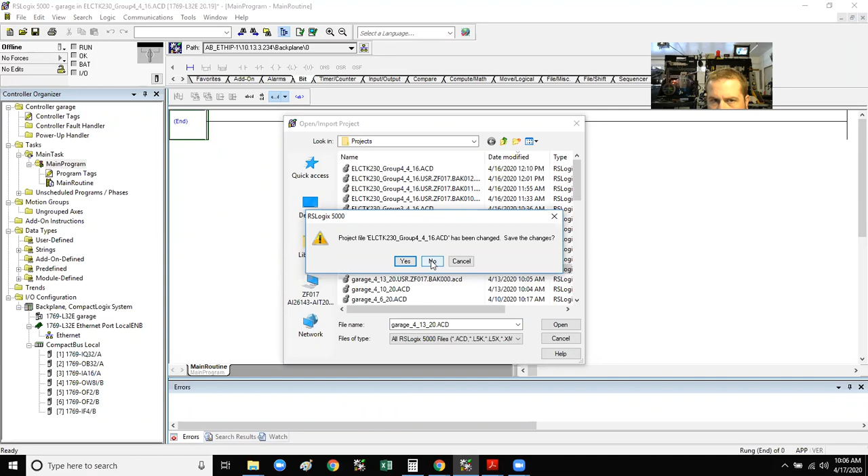Hi Nate, you didn't say hi to me. Okay, this is what we got so far. Hi, hi. You're right, we've got everything except for, let's look, you need like another red strobe light or something, right?

Well, we got the strobe. Wow. Really? What? We've got the strobe while. I don't know, let's look. Where is that assignment? Oh, it's on Blackboard, isn't it? Temp sensor.

Two. 32. There it is.

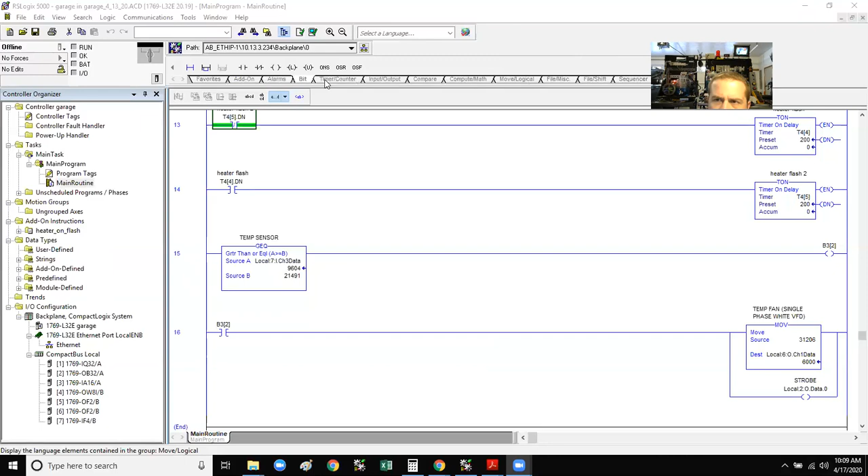Okay, you got it. All right, I think I told group 3 or 4 this yesterday, but I ran out of 3-amp fuses, I gotta write that down. So I put a 15-amp fuse in there. There's actually a book named that. You want me to send you some, Zach? Sure, I need... but I need you guys to let me know when we're running stuff. If that trainer behind me starts smoking, please say something, okay?

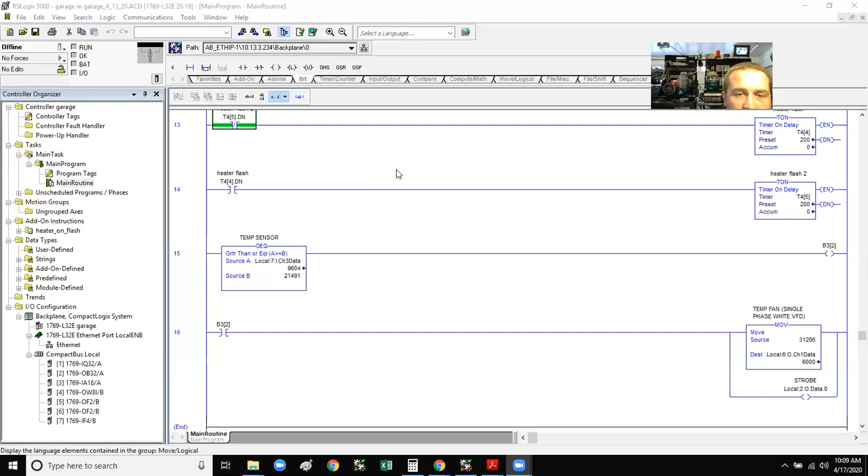You don't need to. What size did you put in it? 15. 15? Oh, I had. Did you check the amp draw on that sucker? You got an amp clamp down there? It doesn't matter, I don't have a choice, I don't have any other size fuses, John. Well, lead wire, understand, the lead wire is only good for 3 amps. It's 22. That's why I'm asking if you've got an amp clamp on there to see what. Nope, sure don't, I'm just taking a risk.

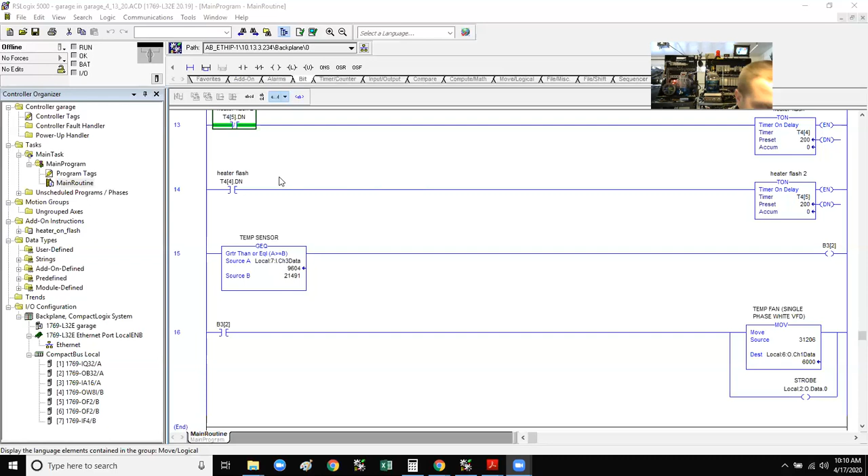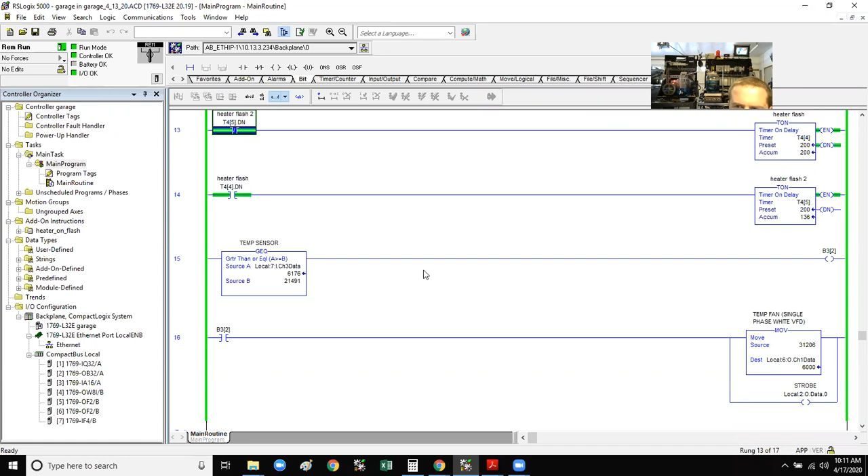All right, sure. Why is it reading at 2 degrees Celsius? Can you go back up to the rungs that show temperature?

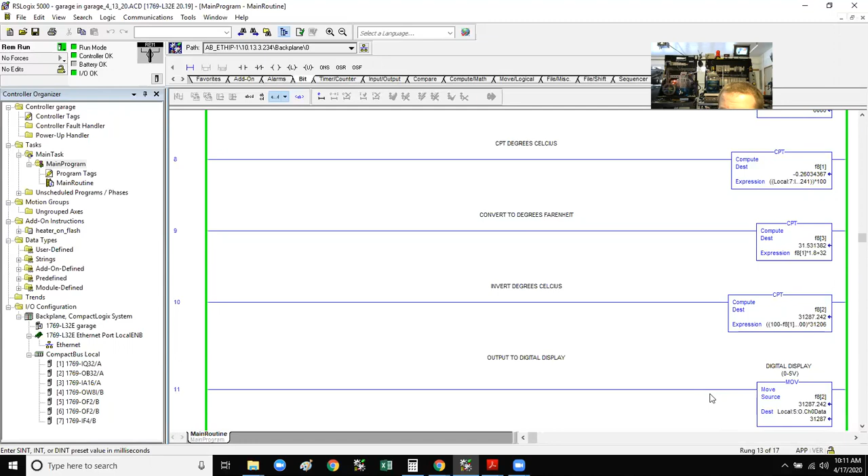Stop. Rung 11, why are we showing F8[2] as 31,287? Degrees Celsius. Yeah, we had to do Celsius, and then convert it to Fahrenheit. Right, but rung 8 should be showing the temperature in the garage right now, and it's reading negative 0.26.

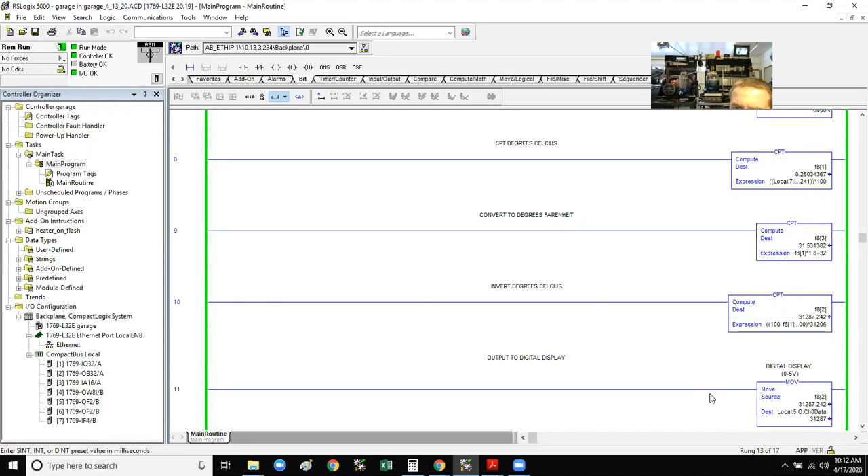Well, in Fahrenheit that's 31 degrees. That's in Celsius. Yeah, I'm not that cold, you know what I'm saying? I can tell you what the temperature is in here.

64. Oh well, I don't know that. Yeah, that's odd. You might have to do some troubleshooting. How should we do that?

Come on, class. What is it displaying, 2 degrees Celsius? I can't see... well, yeah, now I can. It's negative 0.26 Celsius, and he said it's

62 degrees in your garage? 62 degrees Fahrenheit. So that puck the thermocouple is connected to should be outputting a certain amount of milliamps, right? Yeah.

So check on, will we click on rung 8 on the compute function? What should I do? No, I'm saying we actually need to get our meter out and check what's going on behind me. Oh, see how many amps it's putting out. Yeah, so right now it's probably less than 4.

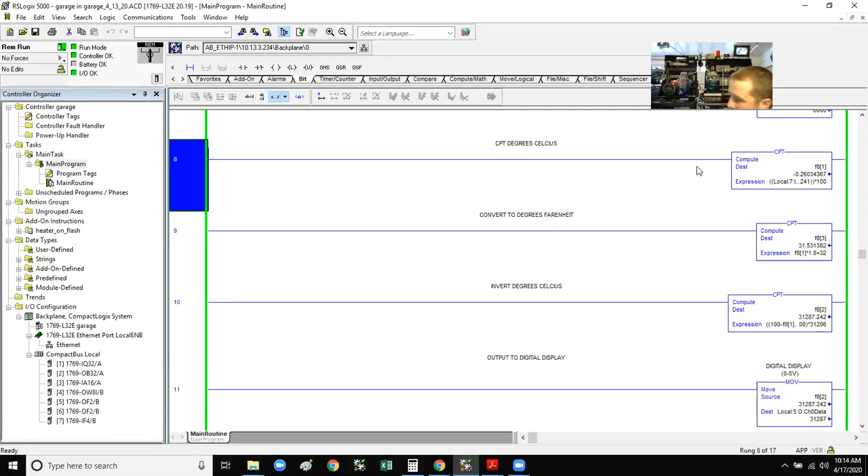Yeah, it's showing negative, yeah. So somebody tell me which input that is for the air temperature, and I will get out a meter and read it. Hold on, I got it. We will do some troubleshooting together as a class, as a family. I prefer to troubleshoot alone.

All right, which input are we looking for again? Sorry, the temp in, right? Air temperature, yeah. All right, temperature sensor is on 7-1, slot 7, input 1. If I put this here, you guys read that.

You already broke the circuit? No, I'm going to check voltage on the puck, see if we got 24 volts. Oh okay. And then I will break the circuit and check current.

Can you guys read my meter, or do I need to be closer? I cannot, I don't know about everybody else, but I can't because it's on a small screen on my computer because of the shared screen.

Can you pin the video? Oh, you can swap them, there's a thing in the corner, swap shared screen with video. If I set it there with your video pinned, can you see it? Yeah, we can, you can see it if you're in full screen. Tilt it forward a little bit more if you can.

Is... yeah, besides John paying attention? Yeah, that's good. Anybody? 'Cause I'm sure right now you're all pulling up the specs. I could definitely see it. I can see it, I was switching over to my laptop from my phone. Your laptop? Yeah, laptop.

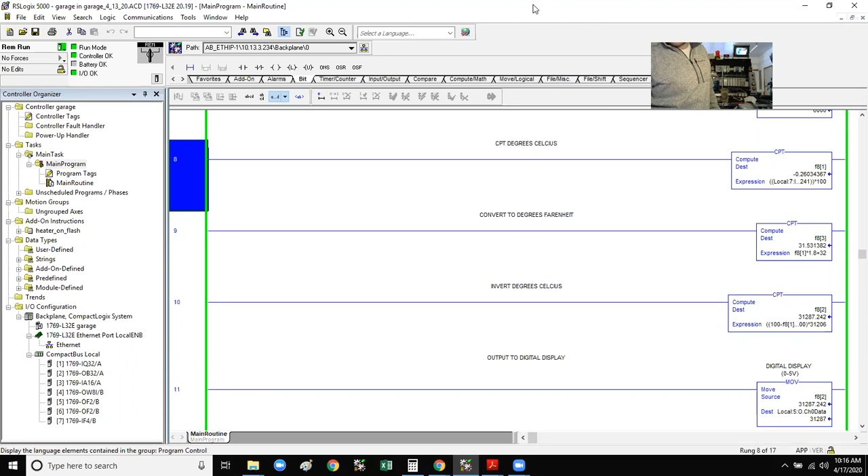I don't have the puck pulled up. Is it in there? Do we need the puck pulled up? Can't see the puck, do this. No, the data sheet's in there. I think you meant the data sheet for the puck. That's impressive, Zach. Zach. What? The table.

Bless you, what's yours? Bless you. Nice shoes, Rona. Coronavirus. Yeah, sorry, it's not the Corona. She said thank you. Bud Light, what are you doing? The Bud Light? Yeah, it's the Bud Light. This guy right here, yeah, we have Bud Light Lime in the fridge. This is that you were drinking the other day. Drinking right now, Jesus.

So you got your voltmeter on it, put your black lead on, I'm assuming, the white wire, and then your red lead on the red wire. I don't have the data sheet, I'm just looking at a picture of it. I think that's... I'm assuming I got a good 24 volts in because I don't know if you can see it, but there's a green LED indicator light.

Nah, I can't see it. You can't trust those either, Zach, those only take like 2 volts to light up. You see my meter? Yeah. It's not reading anything, 0.0.

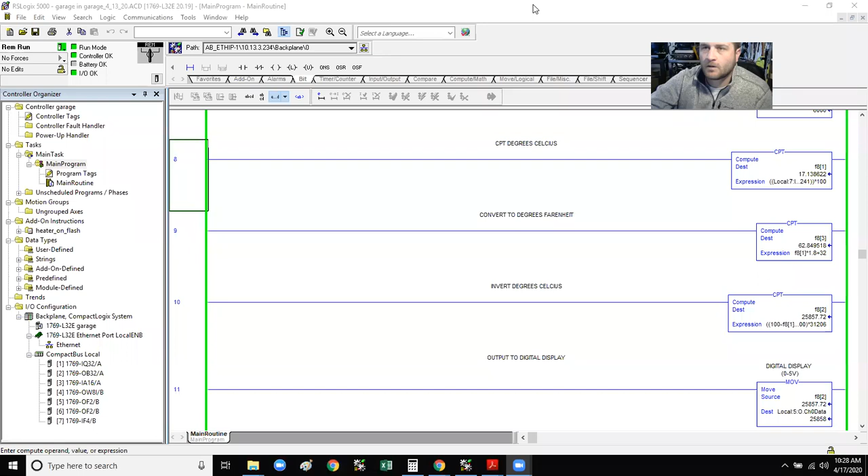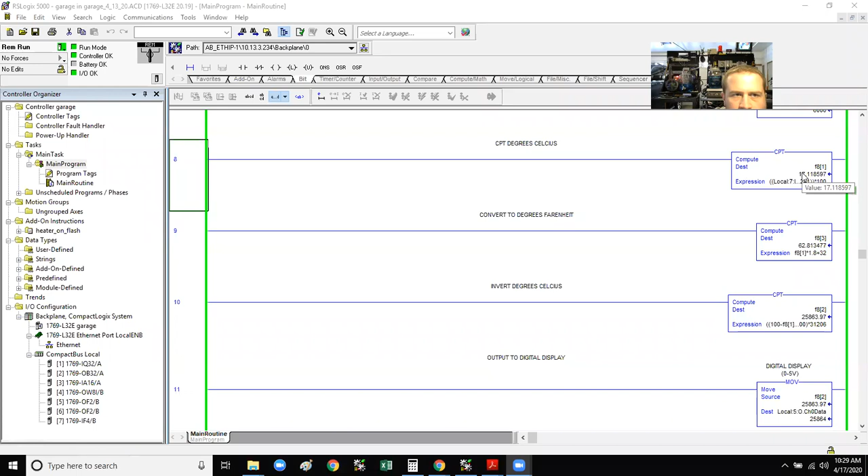Okay. We're reading at 20 degrees Celsius and it says showing 17... 63 degrees Fahrenheit. Okay, so where were we?

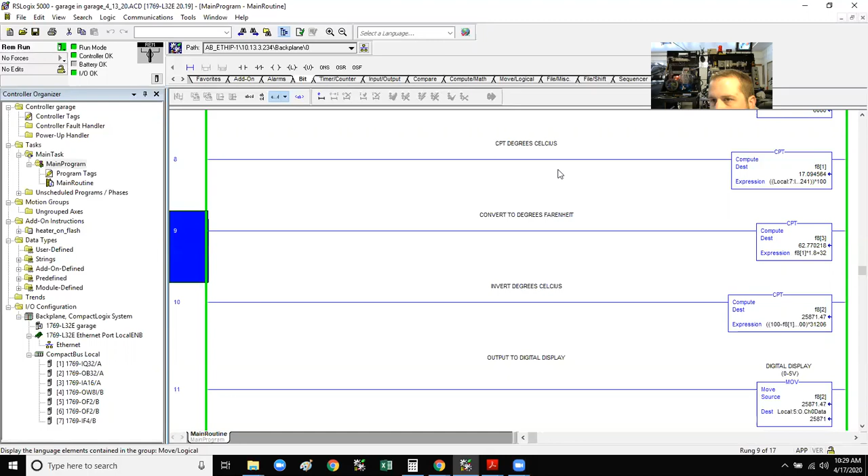We need to run the process now. Yeah. All right, Zach. Oh, we're already running. Okay, what do I need to do? How do we run the process? Somebody who has the process pulled up, tell me. I'm looking for it, I don't have it pulled up right now. I don't have that one pulled up. I got all the other stuff pulled up. Let me do...

Yes. I'm seeing the reading through degrees, it... Fahrenheit, start to rise. And then when we get to 80, then the soldering iron should turn off, right? Yes. Well, we're at 80. Oh, no. Oh, 80.

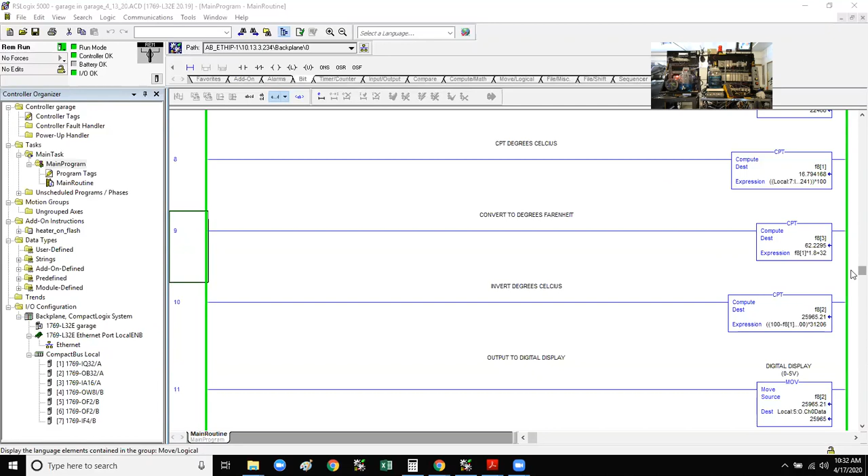That's fine. We need to adjust the numbers because of that lag that's going to be in there. So add a timer maybe. No, I think we go down to the rungs. Do we have the numbers turning on the soldering iron?

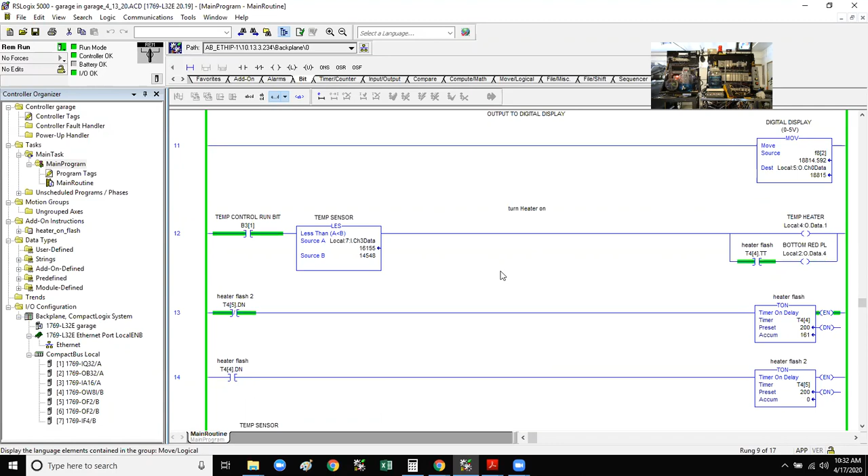Temp heater, so rung 12. Right now we're telling it when the temperature gets up to 14548, turn the temperature heater on, or below 14548. See that? But right now it's off, but you'll see the temperature start to fall. When it gets below that number, it will kick on.

Wait for it. Now it's on.

So what did we talk about doing last time? Maybe you said timer, Brady? I suggested that. Last time, I don't know. But I meant today.

I thought Jake had talked about how you don't turn it off until it hits that high temperature, and then you turn the fan on until it gets to the lower temperature. So instead of having it at 80, put it at 120. Then at the same time have the fan do that, and the fan turns off at 80, so it just stays in between those two ranges.

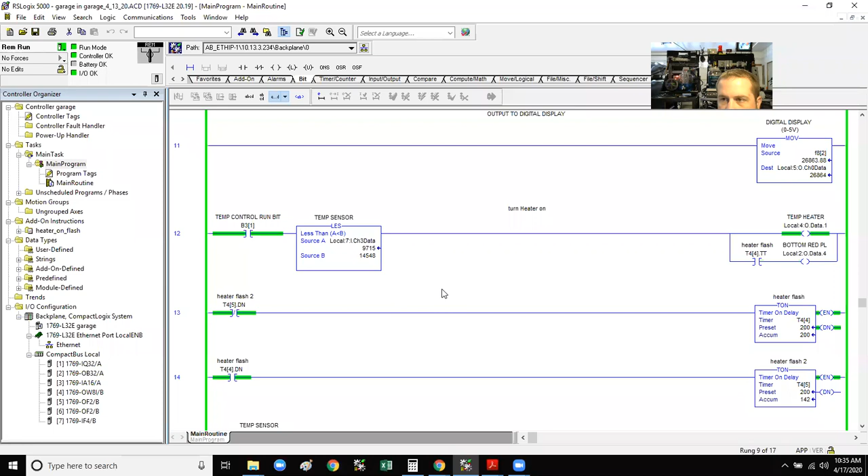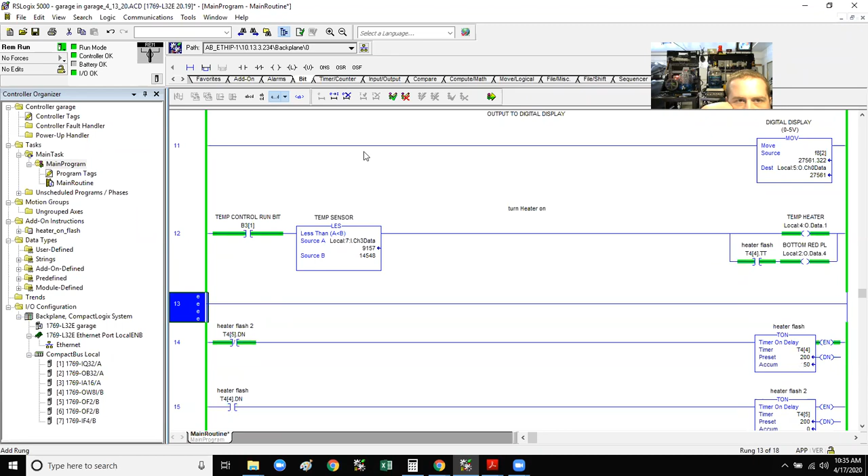So let's create a timer. Let's add a rung there, Zach, somewhere. Okay. Let's go offline while we do this. All right. You got to click on the rung. There you go.

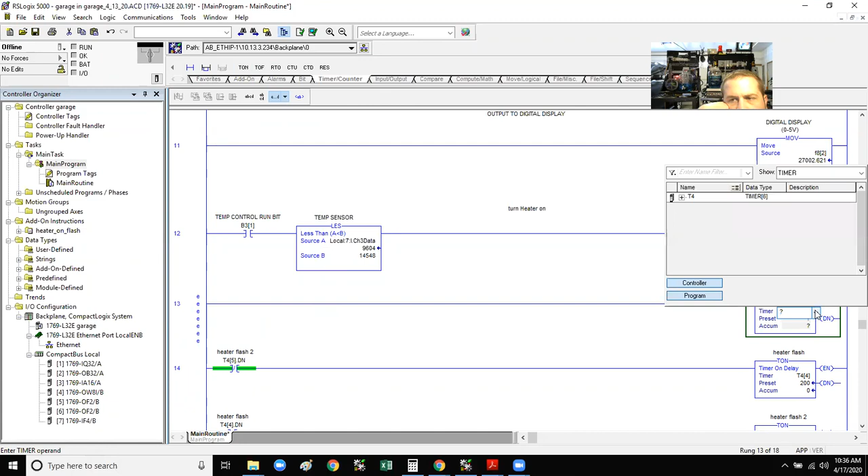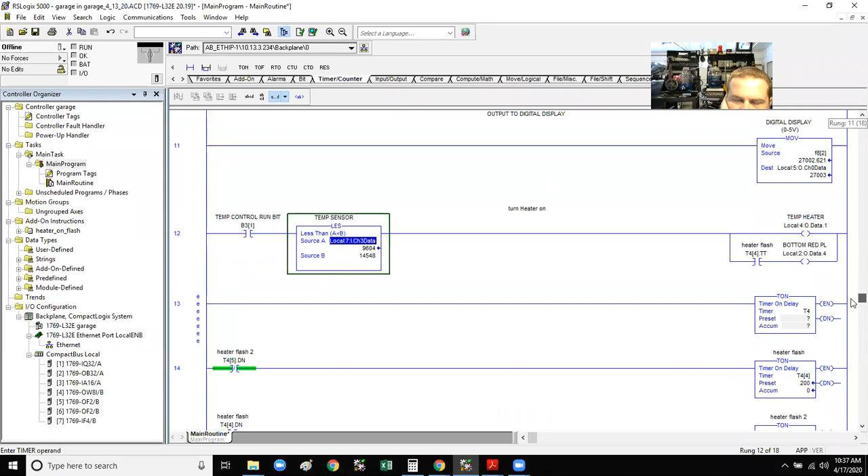Does it matter which one I do? Well, we need to just grab one that we're not using yet. So we've labeled 4 and 5, but I don't know if we've used 1, 2, or 3 yet. I'm thinking we've used 0 and 1 of them because we have a half-second timer and a 0.2-second timer. So let's go look and see what our T4[0], T4[1] are, and then find the other timers - T4[4] and T4[5]. So let's go into controller tags on the left.

Controller tags, and let's put a description into T4[0] and T4[1]. Yeah, and just call it - what is that? Process on, is that what it is? Control on flash. Okay. And then the next one would be control on flash 2.

Now we can pick either T4[2] or T4[3] and label that just 'sensor read timer.' We're going to start with 10 seconds, but we might adjust it. Cool, so then we're going to use T4[2] for the timer that we're using. Okay.

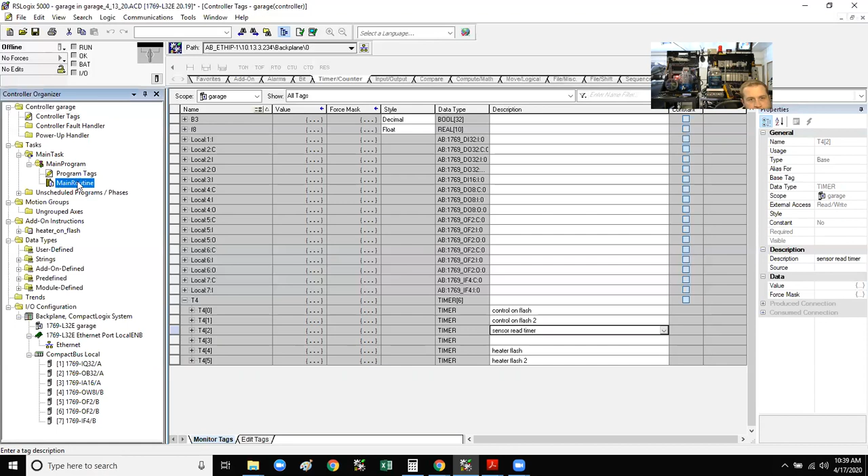Zach, is this why we label things while we go? I think so. Okay, I was just checking.

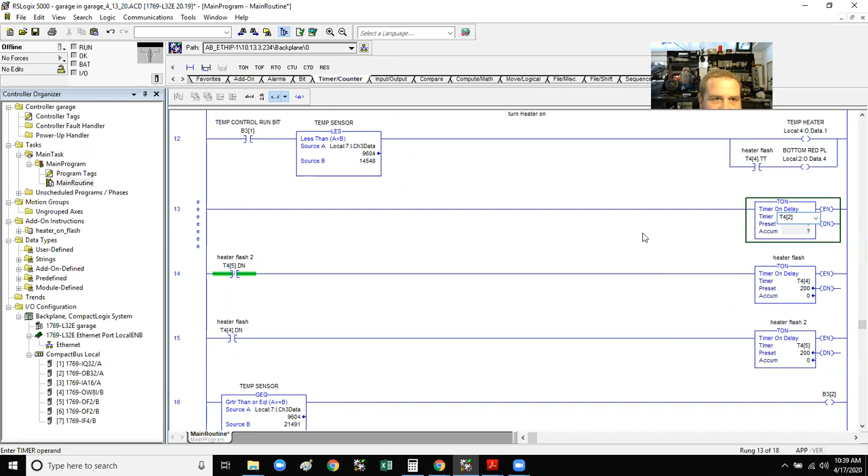He's got jokes. Well, was John the one we're voting to kick in the chat today? Hey, no, that was a serious question. Don't kick me. I think Don gets to decide since he got voted out yesterday. I think we should vote Don out again today. Yeah, I passed go, I collected my $200. I'm good. Hey man, no - if your kid starts hollering and screaming again though, you're gone. You're done. Oh well, let me go get him on the mics then. Don't sound too eager. Oh my goodness.

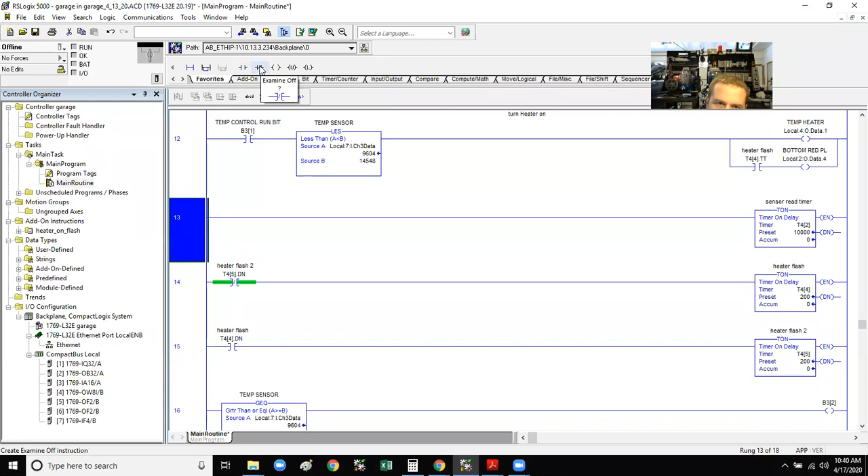Okay, so we got a 10-second timer on it. And then what's going to make that thing reset? Can't we do a reset rung where when it reaches its preset, it will just reset itself? Timer timing. You could put a T4[2] done instruction in front of it. I didn't even think about that. But would that reset it though? Wouldn't it just stay at the same accumulated number? If you use that one, if it's examine if open. Yep.

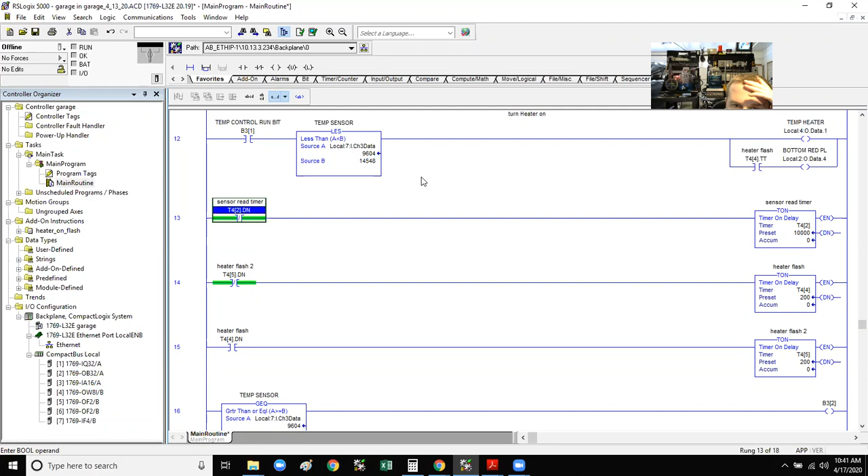Okay. What do we want to happen every 10 seconds? We want to read temperature. Yeah. So then we need to find the temperature sensor, right? Mhm, and then use that timer timing bit.

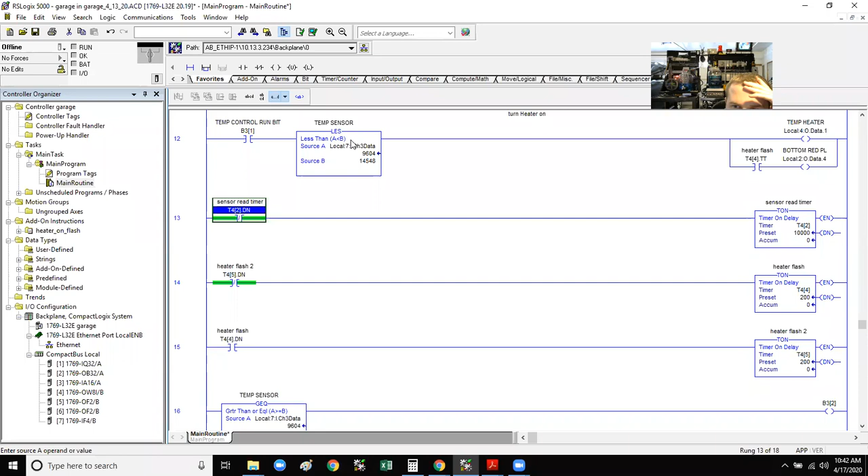So put the timer timing bit before this. No, because that rung is to turn the heater on. Probably rung 16 - we want to either control when the temperature sensor... that's red, B32. So it'd be before this one. What are we using B32 for? Maybe just to turn the temperature fan on?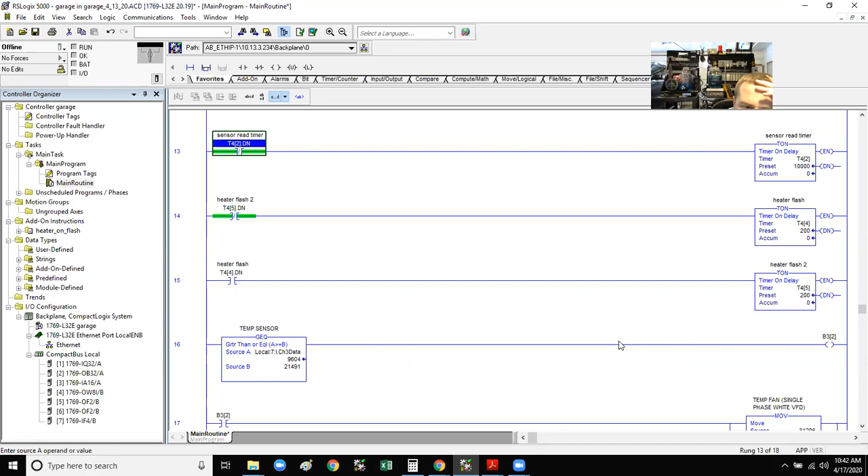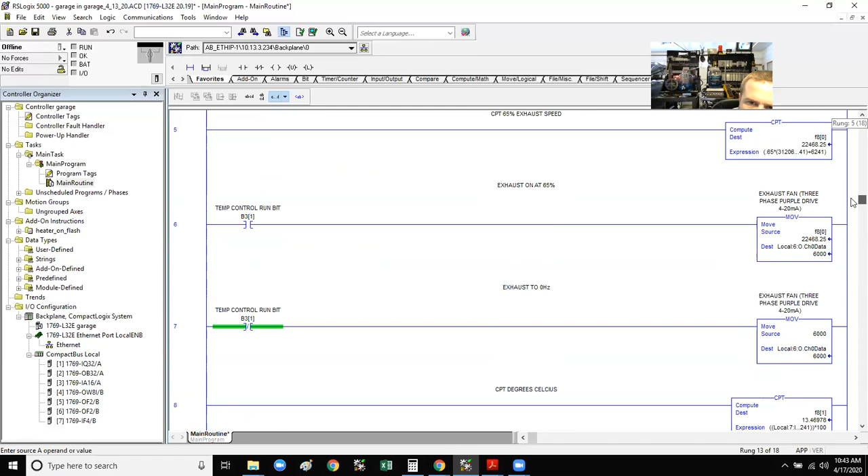Which rung are we... which rung can we put this in? Scroll down a little bit. Nope, can't put it down there. Yeah, just scroll up, it's at the top. Nothing in there, go back down. Stop, go back up a little bit. Stop. Can we put something in any of these rungs? 8, 9, 10. I mean, we could.

Because that's our temperature, right? Yeah. What are we doing in rung 8? Reading, computing Celsius - yeah, computing from the temp sensor, T2.

But what if we told it, okay, only do that calculation every 10 seconds? So then put that timer timing bit before that compute function. Yeah, or done bit. Yeah, done bit. Yep.

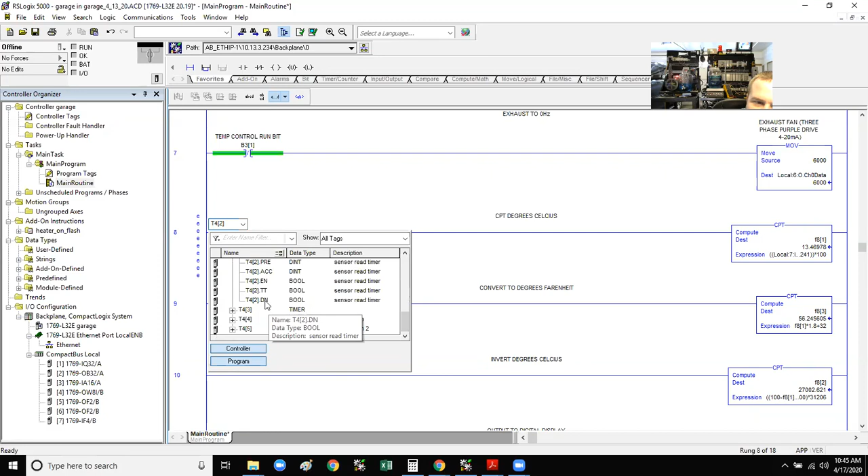Zach, if it was me, I would probably put that done bit on line 8 for the compute Celsius. That's a good idea, John - I don't think any of us would have thought of that. Thank you. Oh, you're welcome, Brady. That's why I put my 2 cents in, brother. Still get $1 back. I think we might have problems with it, but we can run and see what happens. That would be all right. So let's go ahead and run that and see what happens - see if it reads the temperature every 10 seconds.

Think on the next one we'll get the temperature to turn off. Yes. How come it never turned off? Did it? No, never did.

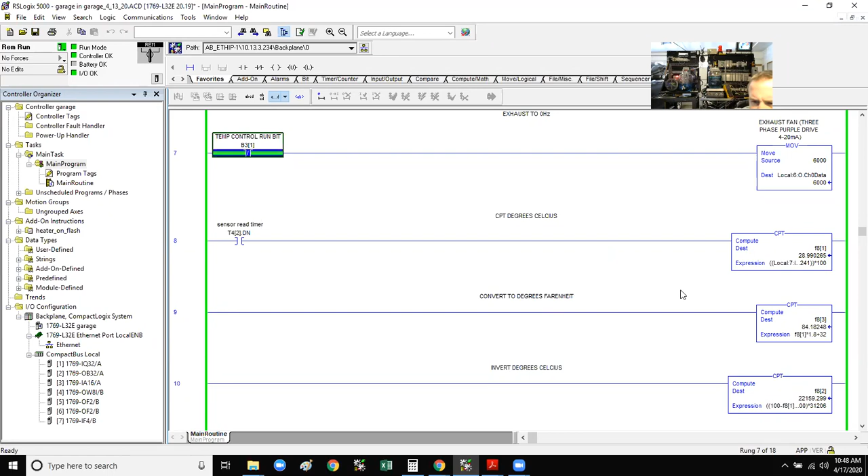Feel like we're going to be waiting forever. Oh boy. It's just sitting at.

Okay, we're below 80. Why is it not kicking on? Are we using it being the measured value as something causing something to work later on? Like, are we using the temp sensor data? Yeah, okay, so here's turn the heater on. We're below this number. Why is temp control run bit B31 not energized? The bottom red pilot light isn't either.

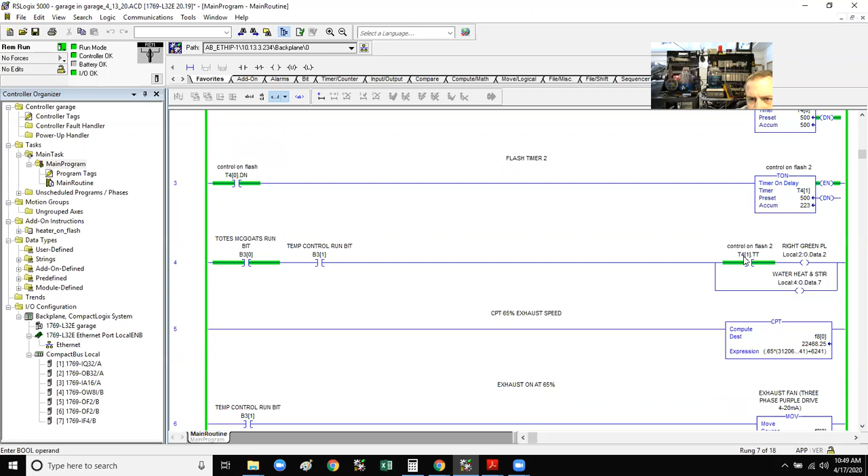Oh, because I didn't push the push button. Process control is not on. Come on, Zach. Now we're running. Yeah, Zach, I was looking. You didn't turn on process control. Thanks, John.

Why is it still clicking on and off? Maybe because of rung 3. That's why.

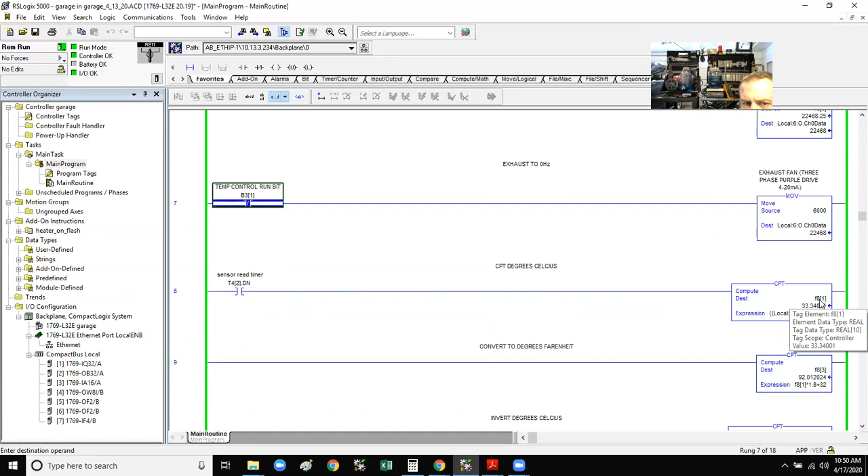We're using the temp sensor instead of this. So we need sensor read timer T42 done on that same rung, right? Hey? Right. Mm-hmm.

Isn't that gonna throw off your heater though? Because it's only turning on when that sensor reads, or the timer is done. Yeah, but that's what we want, right? We only want it to turn on every 10 seconds.

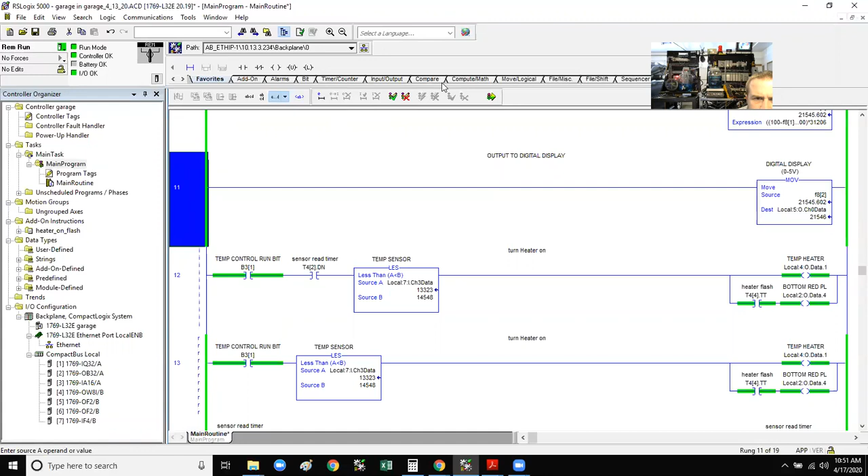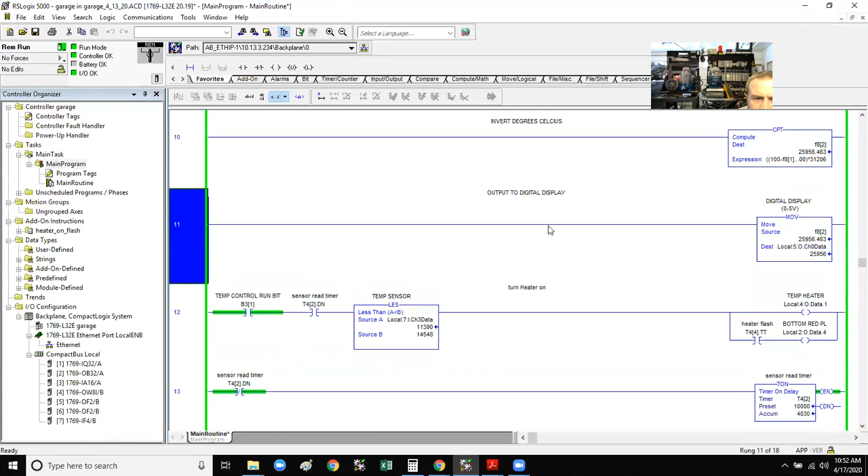Wait a minute. Yeah. Right? I guess my serious question is, again, hey guys, quiet down so I can talk. If we're trying to keep it between that window, why don't we just have it turning on and staying on until it's close to the end of that window? I said, how come we don't have it just turning on and staying on until we get to a desired temperature or temperature range?

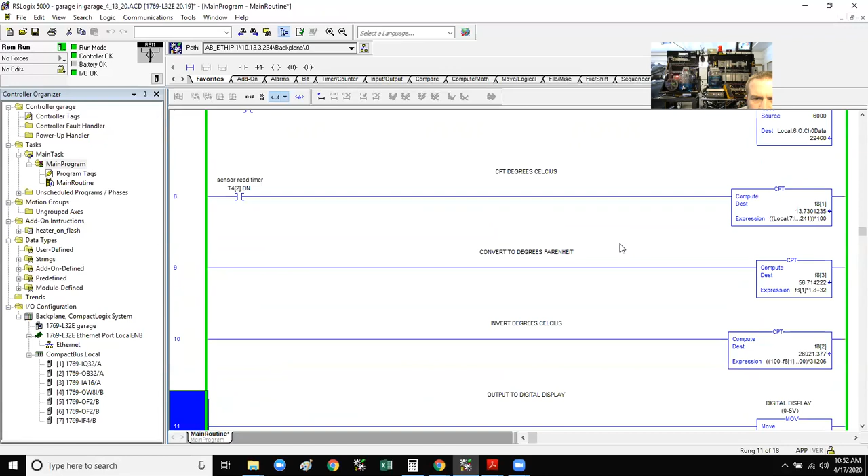So like stay on till 100 degrees for both of them. You mean having a target temperature in the middle of the range instead of... Yeah, or something to that. Yeah, let's do it. Degree. I mean, I don't know.

Let me show you guys how to use Excel for handy interpolation. What are our numbers for the temperature sensor input? 4 to 20 milliamps. Hold on, I gotta pull them up. 6241 and 31208. And if this is 0, yeah, this is 100.

If we have input and we have a temperature, so what would our formula be for this? If we said that this, that would be our max, so that'd be 100.

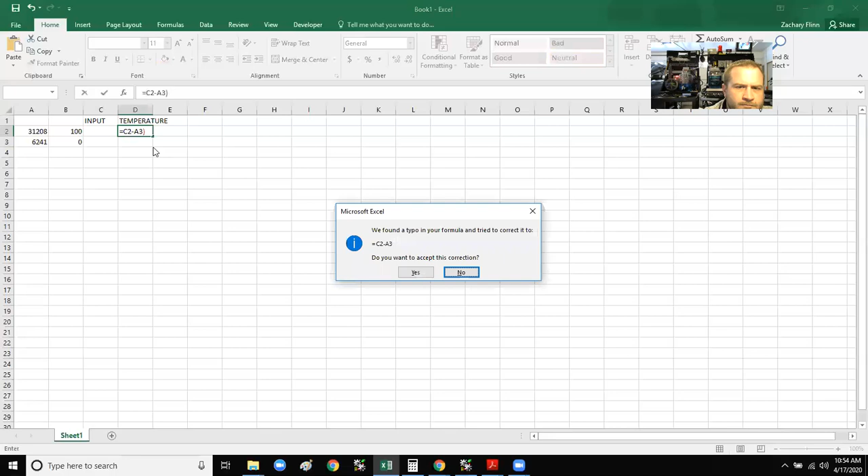Equals this minus this, divided by this minus this.

That would give us a percentage, which would also give us degrees Celsius, right? Yes.

So if we had an input of 6,000, or 10,000, it'd be 15 degrees Celsius. So I guess we'd have to take this whole thing times 100. See what I'm doing? Instead of having to do the math every time. Yeah. You lost me at 100 though.

Why are we? Oh, because instead of outputting a percentage, we want a temperature. Yeah. Input 1,000, we get an output of

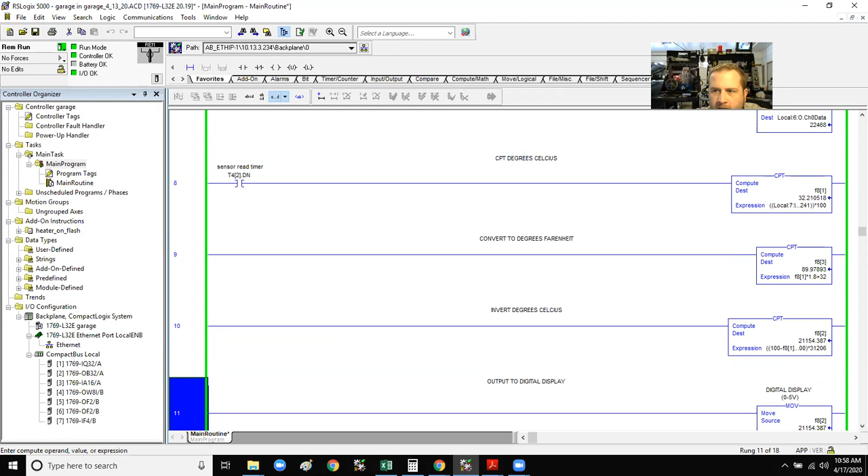So what's 100 degrees Celsius? No, we want 100 degrees Fahrenheit.

What's the formula for Celsius to Fahrenheit? Subtract 32, times, multiply, 5 divided by 9. Yeah, 5/9.

What is it? Subtract 32 and then multiply times 9/5, by 5/9, times 5/9. Yeah. Celsius to Fahrenheit is Celsius times 1.8 plus 32. Wow, you're smart. Oh, were we going from Fahrenheit to Celsius then? We're going from Celsius to Fahrenheit, right? Yeah, yeah, 1.8, so we plus said 32.

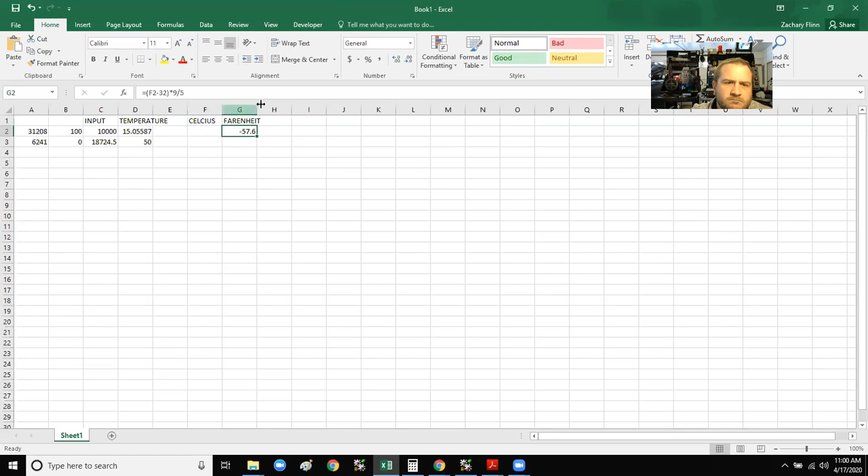Yeah, we went the wrong way. That's what I was saying. I thought you said Fahrenheit to Celsius. My bad, yeah, it's all what is it? It's plus 32, times 1.8. Wait, that's 9/5. Yeah, that's the same either way. Yeah, so that's the right one. No, because 0 degrees Celsius is not minus 57.6 degrees Fahrenheit. I think it's times 5/9.

Oh, it's 5/9 degrees Fahrenheit. Wait a minute, you don't even have a number in for Celsius. I know, but it's 0. Is it going to assume 0? No, it does not. Does it? Yeah, it assumes 0. It should be 9/5 times F2 plus 32. Oh, okay, so 9/5 is 1.8, times this.

So we had the order of operations wrong. If I put in 100 here, it should be 212 Fahrenheit. Right, okay, good. So then what's the opposite? We wanted to take Fahrenheit and convert it to Celsius. So that's whenever you do the Fahrenheit number minus 32 divided by 9/5.

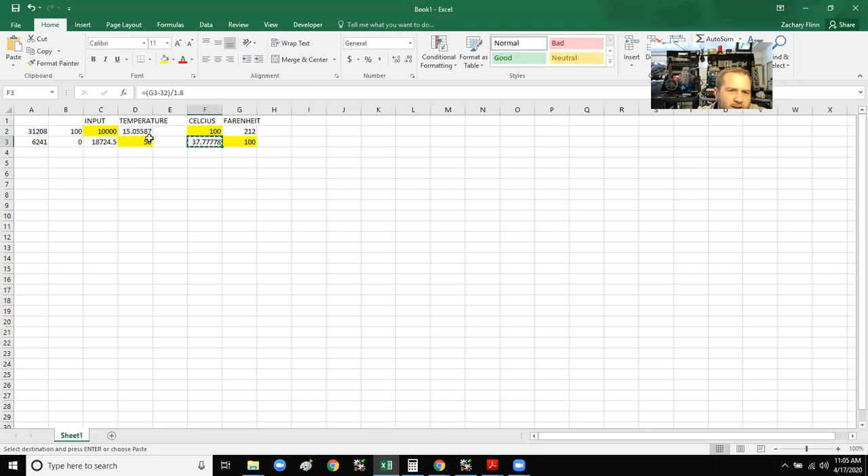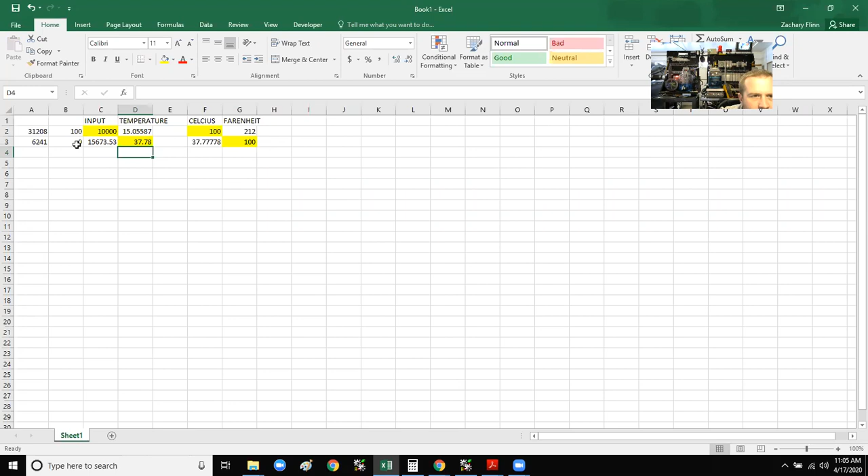If we had a temperature of this, 37.78, our number needs to be 15,673. Got it? Got it. Got it.

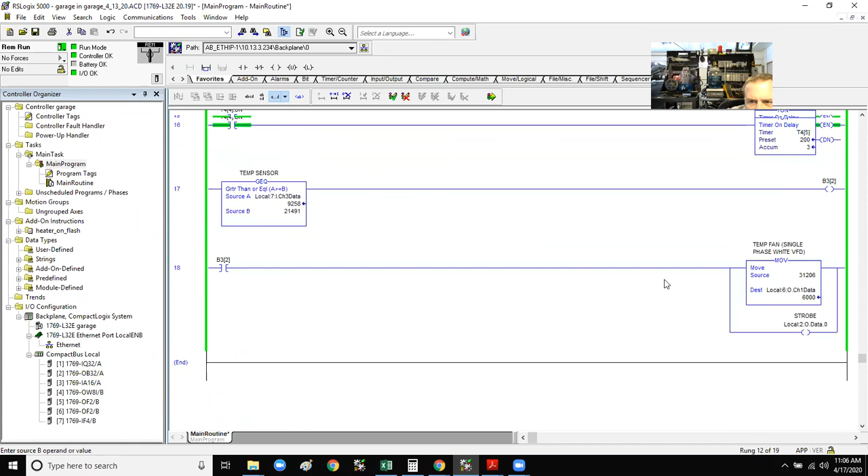Turn heater on. If this is less than 15,673, turn that on. And where's the turn the fan on? This is greater than 15,673.

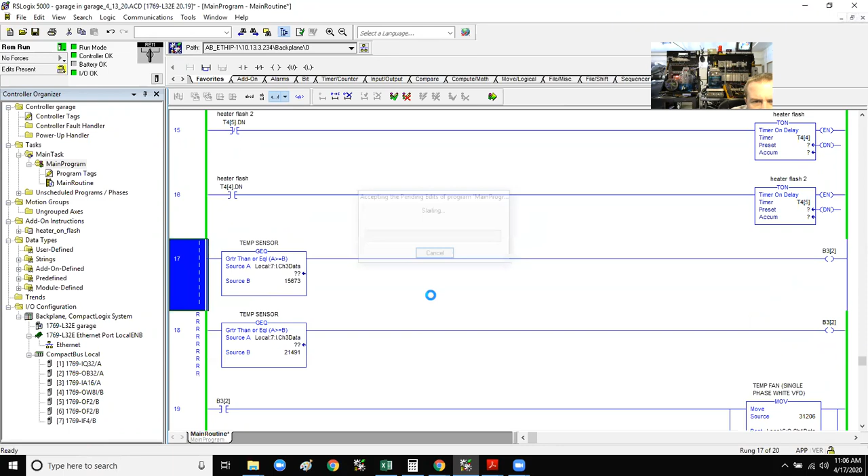Or do you want some overlap so we can see if we can draw as much current as possible and burn that sucker down? Yeah, we should do that. Yeah, let's do that.

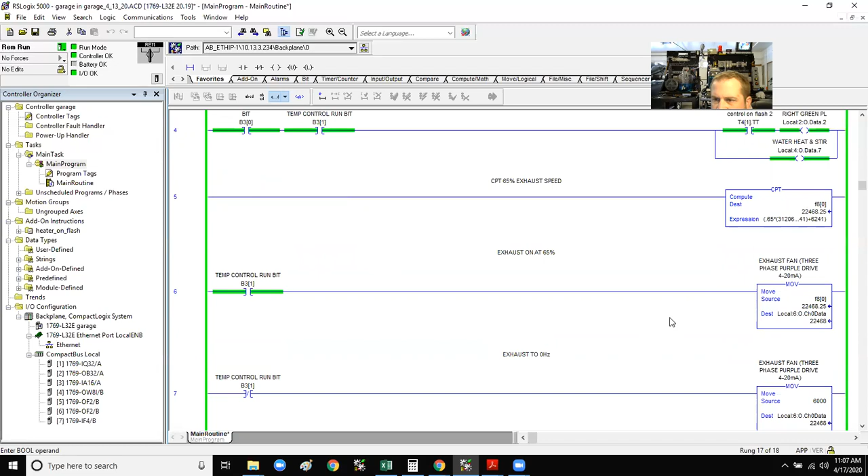Why isn't our temperature heater turning on? Did you hit auto start this time? Yep. Did you hit the green button? Yeah, okay.

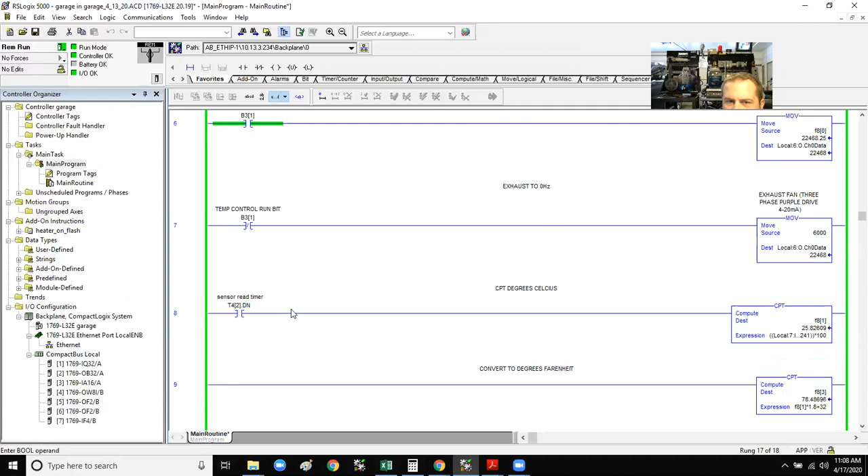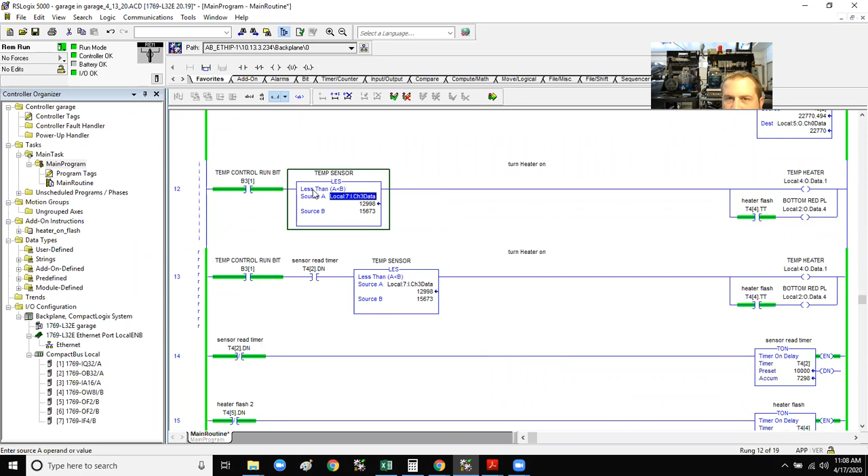I gotta head out because I gotta get back to work. Bye, Kenzie. Is there gonna be much after this? No, because it's 11:10. Yeah, I know it's 11:10. That's why I'm going back to work, Nate. Stop yelling at me. You can get me first. I don't like when mom and dad fight. We're not fighting, Luke, we're just having a discussion. We're just mad, but I gotta get going. So if class is over, I gotta go. And if class is over, then I'll just finish it on the YouTube video. Okay, bye. Bye. It's all your fault, Nate.

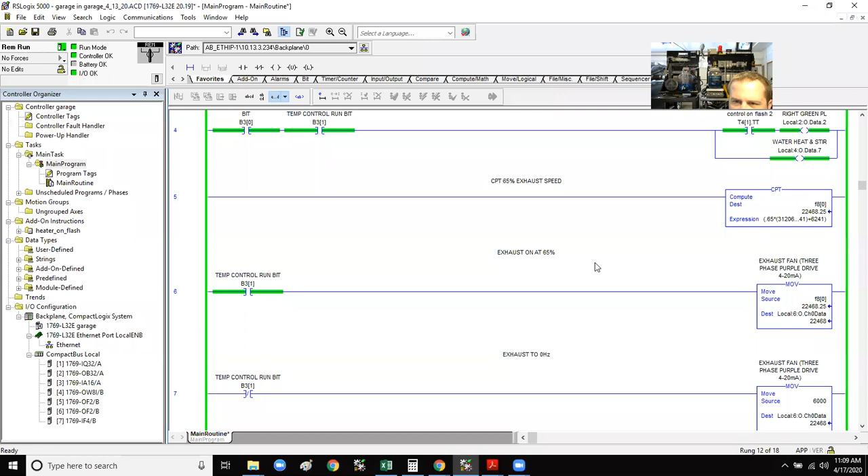Okay, so when we get to 100 degrees Fahrenheit, the soldering iron should turn off and the exhaust fan should turn on. Where's our temperature in Fahrenheit? Right there, 72.

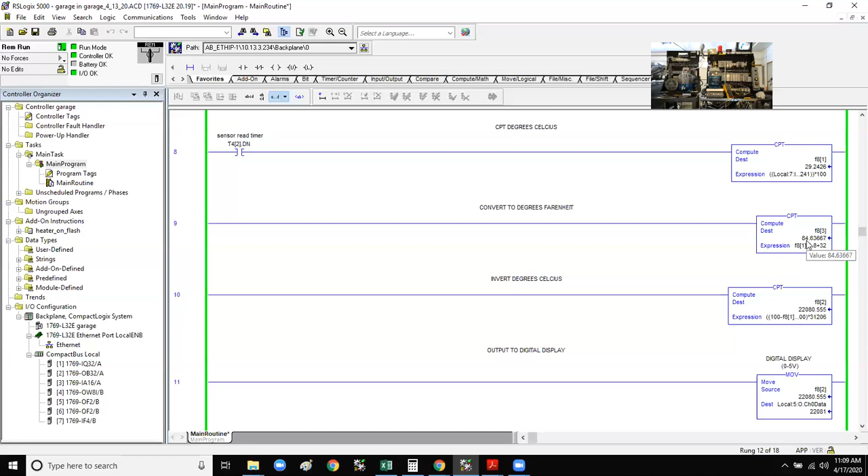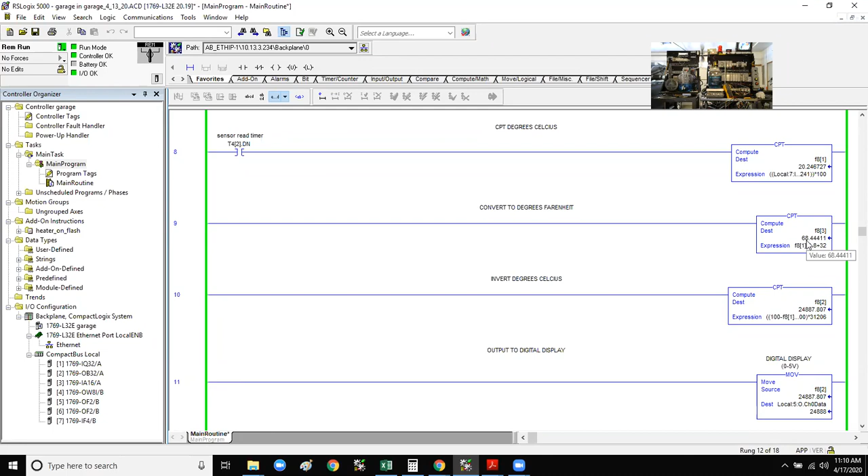Why are both fans on? Bottom one's the exhaust fan. I'm wondering why the temperature heater and the exhaust and the air temp fan are both energized. We're less than 100 degrees. Why is the... oh my. Oh, because we didn't move it to 0. See what happened? Yep, somebody explain that to me.

Just turn the process off. Yeah, why is that fan still running? Because the heater flash, because you moved the number into the file, basically saying turn it off, turn it on, and you don't have another move function moving another number to that file saying turn it off, correct? Right.

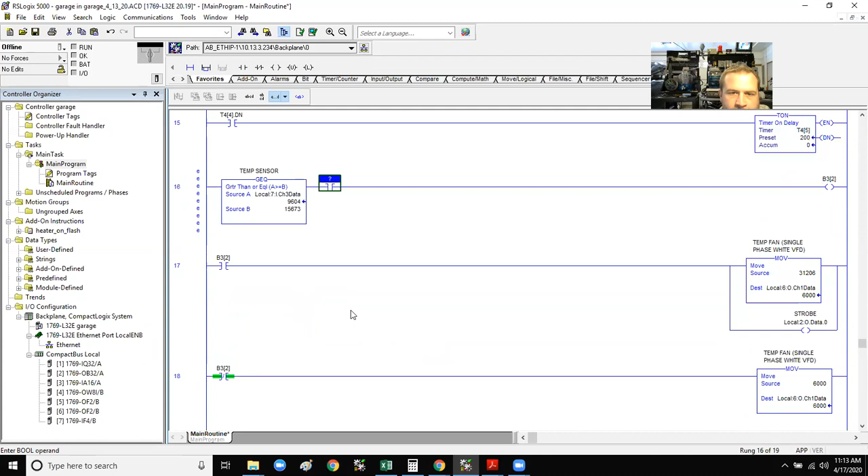T4[2]. We also want to do it for the heater on.

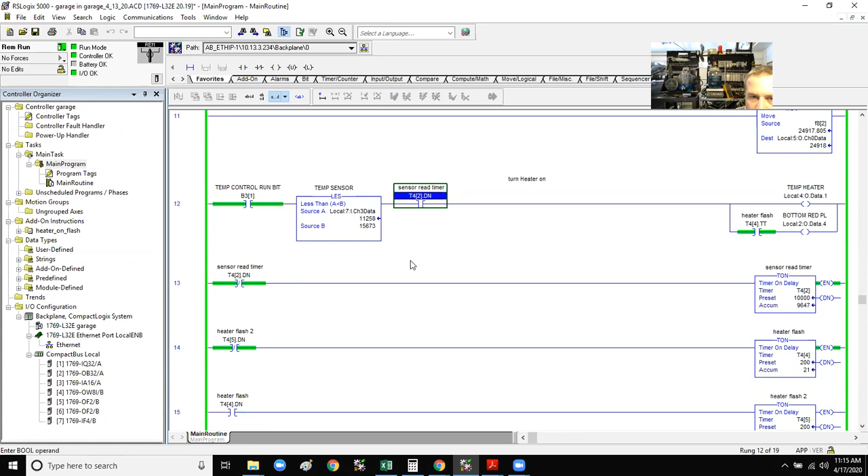Every 10 seconds, this is becoming true and then going back off. Uh-oh. Oh, we'll have to fix that next time. I think we're close.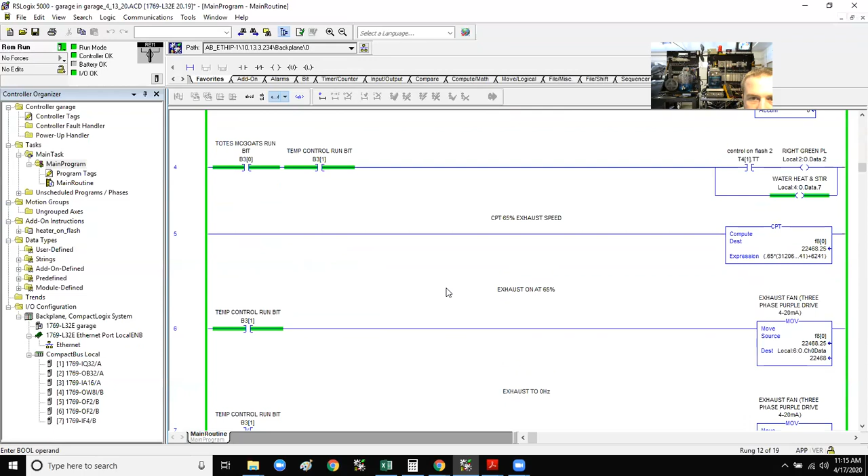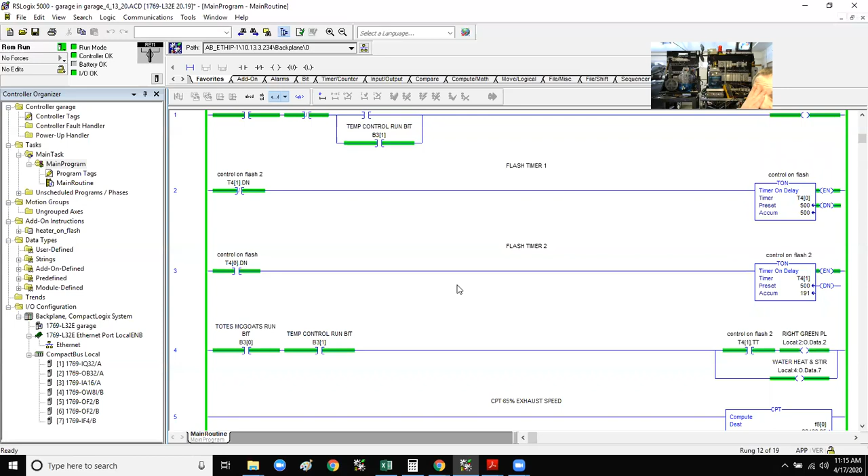Then it's on the HMIs, correct? Yeah, once we get this dialed in, we'll move on to the HMI. We'll design something for this process using the tags in the system that we have here. Fun, huh?

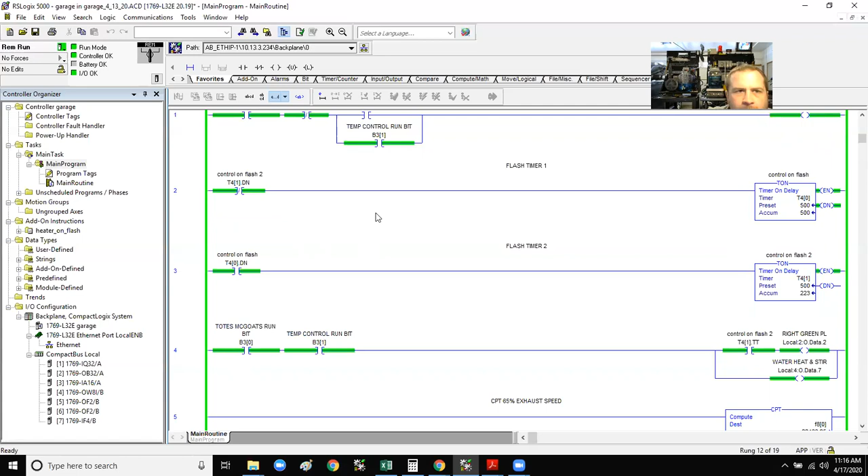I do have one question. Does anyone know if Bass Pro's open? Since they're essential? Yeah, they are. All right, cool. They're essential. Buying a new gun? I can't, but...